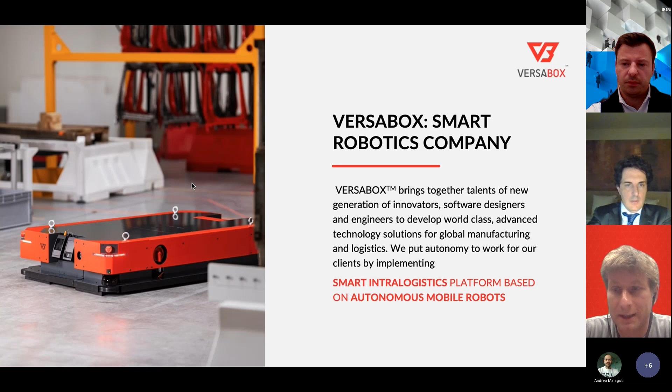But this story is important, because we have in our DNA industrial processes as well as industrial standards like safety, connections, IT, and so on. We really understand how it works and how the industrial environment looks like, and what we can expect from the process point of view, but also from the workers' point of view. This is why our robots and our system are designed exactly like they are.

The main pains in the case of intralogistics, which you probably already know, I'll go briefly through. First is lack of workers—this is in our region. Probably in Italy it's more about cost instead of lack of workers, but in Poland and Czech Republic, in our region, there's really a problem with workers.

And they're becoming more and more costly. What does that mean? If we use these costly and unavailable workers for simple tasks like moving or pushing goods within your processes, we waste their skills—meaning we're unable to use their hands, brains, eyes. Even the worst worker has a supercomputer in his mind, in his head.

Another issue is operational risk. If heavy equipment is utilized and operating among humans, it's pretty risky and a lot of accidents may happen. Efficiency is another problem.

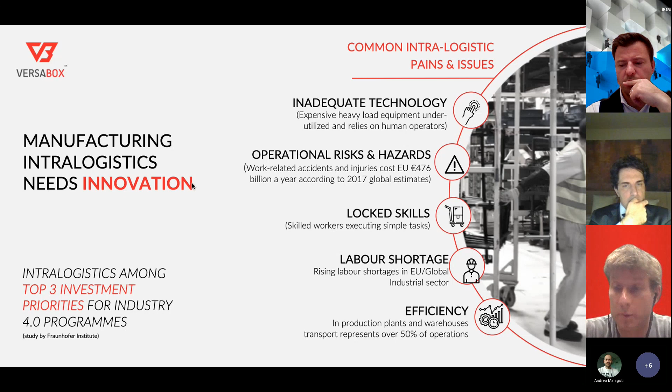If you have no workers, or they are rotating and making mistakes—there are a lot of companies whose processes are based on human experience, meaning that if those workers retire or change jobs, you lose all that knowledge. In the case of an automated system, if it's properly designed, it will stay and keep operating even if those experienced people change jobs.

There are a lot of reports indicating that automation and robotization are an important part of company growth, efficiency improvement, and savings generation, and so on. I don't want to talk too much about this, but based on this tendency and these pains,

we decided to implement on the market our product that we call Autonomy at Work, and how we think about intralogistic processes and their automation. First, we believe customers are not just looking for robots—the robot platform is just a part of the process, part of the story. Customers are looking for, and need,

an end-to-end solution—a system that can be fully integrated with hardware and software facilities, that can be managed, properly designed, and operating in a way that allows you to achieve your process KPIs, improve efficiency, and generate savings. This is exactly what we are delivering to the market: Autonomy at Work is a whole package, an end-to-end solution that can be implemented in your process.

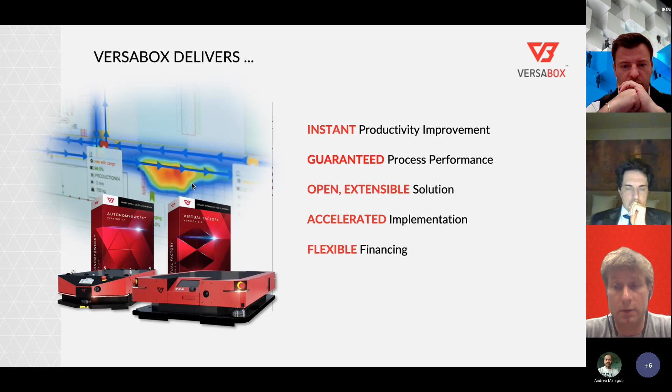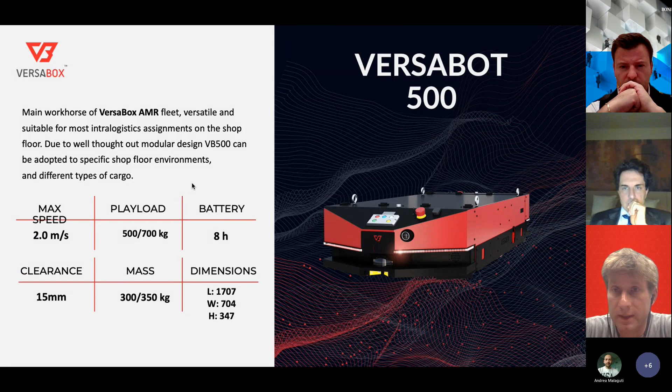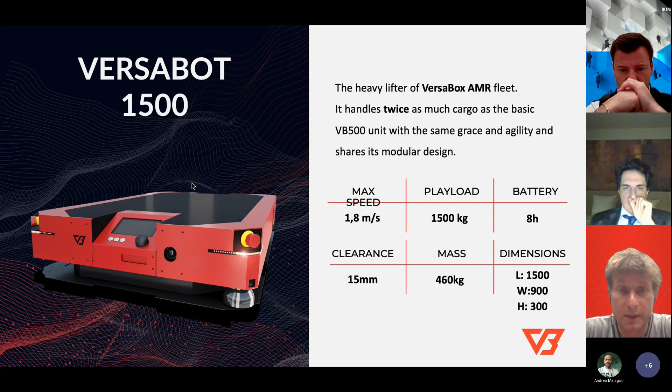Portfolio. Right now we have in our portfolio two mobile platforms: VersaBot 500 with payload up to 500 kilos, and VersaBot 1500 with payload up to 1.5 ton. Both of these platforms have a different construction, but use exactly the same software for navigation, autonomy, process management, fleet management, and so on and so forth.

From the beginning, because of our industrial history, we thought about this system as a modular one, where we have the standard platforms, and then we deliver different tools.

Some of those tools may be standard from our point of view and could be used relatively easily in different types of processes, for example like a lifter or a special transportation platform where the robot is equipped with a mechanical lock. We are able to dock under this platform, lock it, and tow it to the destination, or exchange empty for full, and so on.

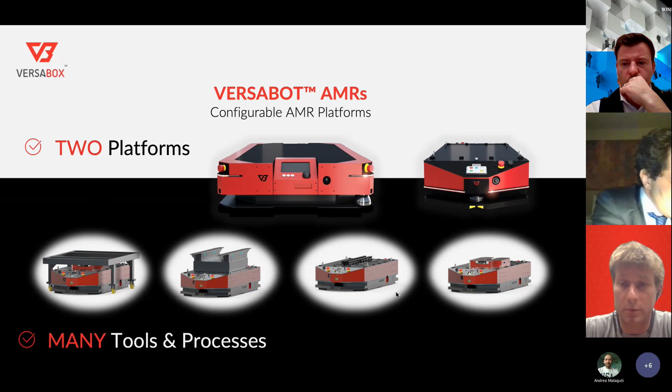And also permanent lock that allows us to connect our platform with some more advanced or complicated automatics like robotic arms or grippers, and provide more tailored processes. But this modularity gives also another advantage.

First of them is easy and simple after-sales or service maintenance processes. If we have the modular structure, we are able to replace relatively easily the whole front with the sensor safety system, or drive units with the drives, gears, electronics, and so on, and the robot can get back to the process relatively easily if any problems happen.

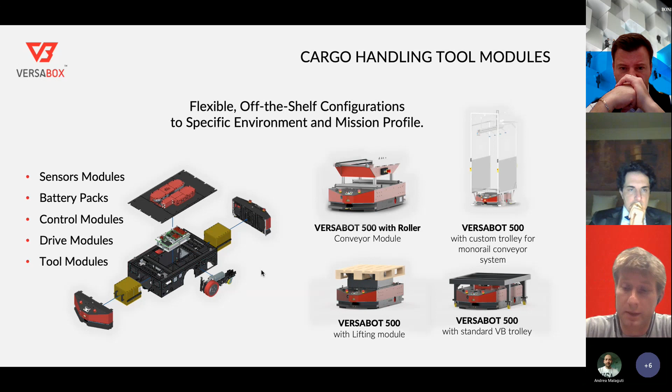That means that we and our partners are able to guarantee better and faster after-sales services, and probably better SLA than others. But modularity also means something different: it's a system that could be tailored relatively easily to the customer's needs.

For example, this is a real case that we already have. This is for the tire industry, and the goal was to drive with big truck tires, okay, twice bigger than the robot itself, this VB500, but not so heavy that it makes sense to use the more costly and bigger VersaBot 1500. We are able to use the heart of the robot, the main unit equipped with electronics, drives, computers, and all the autonomy algorithms, and replace the front and sensors with the tool, integrating the tool with the robot, and have, to be honest, different robots, but based on the same system.

It's easiest for us for production, but also for the customers and us for deployment, because the procedures look exactly the same, as well as after-sales services.

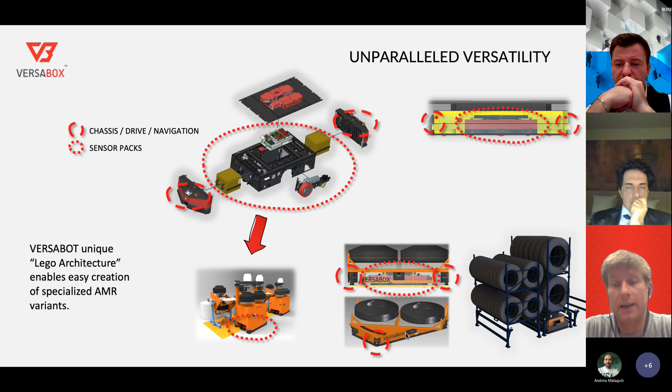Autonomy at work: our system consists, of course, of robots, as I mentioned. They are responsible for the physical part of the process, and the rest is software. Software responsible for environment mapping, path designing, process design, and process control.

The newest part of our system is the virtual factory, and this is the module that allows us to build the model of your process, design the process, simulate it, and start discussion about the process data, working with our partners and customers based on real data instead of some feelings about how the system may operate. Optimize the system, and finally deliver the optimal solution to the customer. About the virtual factory, I will tell you a little bit more later.

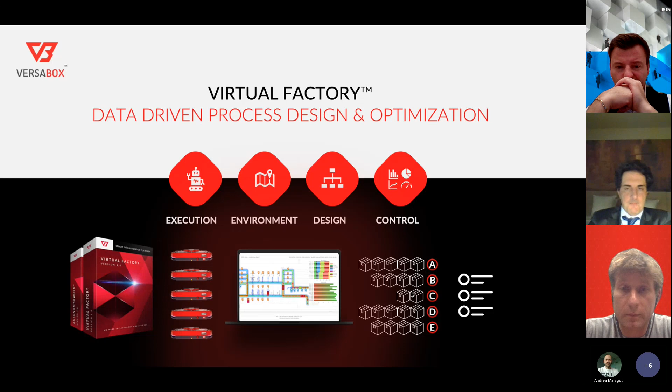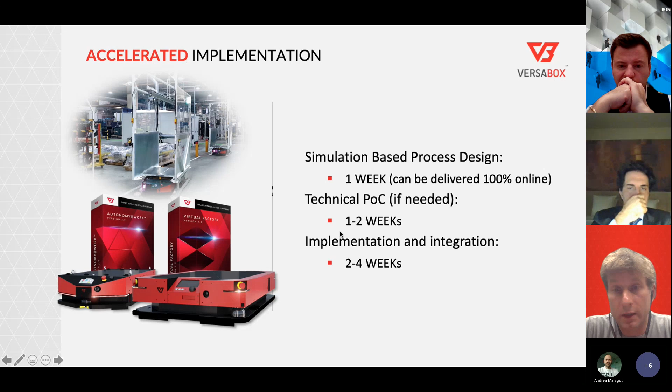But if we have such a complementary system that consists of robots, autonomy, fleet manager, multi-robotic system, and virtual factory, we are able to implement the whole process relatively easily and fast. Based on the simulation, we are able to design and check the process, check all the bottlenecks and possible issues, design the process virtually in our lab, and then arrive on site with the final solution. That allows us to reduce implementation time.

We are also offering different types of financing, and this is also related to the new concept of Industry 4.0 — customers are looking for new solutions for financing such systems, and we try to be flexible. We are offering the system in CapEx, but also in OpEx, where you can rent or lease. And sometimes we are also able to consider some hybrid solution.

For example, hardware can be delivered as CapEx or OpEx, and the server that is responsible for the process can be delivered as software as a service. And you can also manage your cost and your budget in a different way.

We are located in Poland. We directly cover our region: Poland, Czech Republic, Slovakia. But right now we also start to grow outside of our region. We have our first partners in Germany, one in France, and of course a big and one of the most important of our partners or dealers, CLS, which I mentioned, from Italy.

Main customers that we already have include Faurecia. This is our biggest customer, but we also delivered our system to Hutchinson, ABM or HAF, and to some Polish players like Padmark, which is a big producer for IKEA, Cisowianka, a producer of bottled water, or Lubella, the biggest Polish pasta producer.

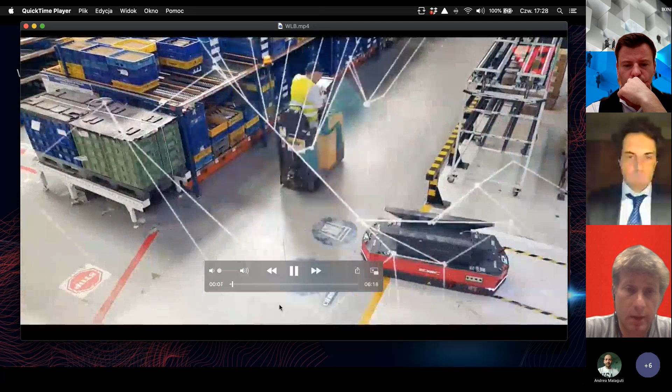This is the Faurecia plant in Poland. The system you see on the screen has already been operating there for more than 3 years, and we are responsible for right now 85, even 90%, of the internal transports within the process. This is just the beginning. In this case, we deliver the production parts from the warehouse to the production welding stations.

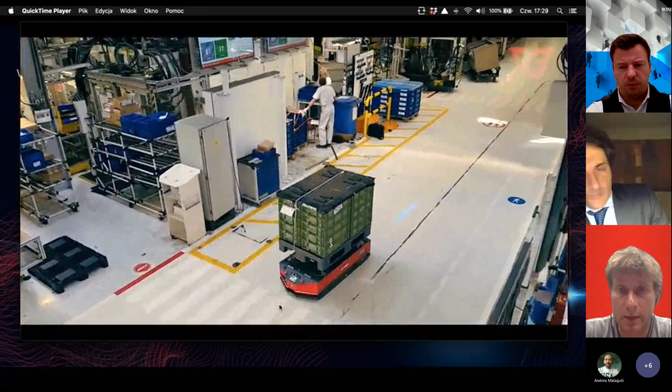As you may see, the robot is equipped with a lifter dedicated for palletized load transport, operating in full autonomy — no induction wires, no magnetic tapes, no mirrors. It navigates based on the natural environment, operating between humans, logistic trains, and different types of trolleys located randomly everywhere in the plant.

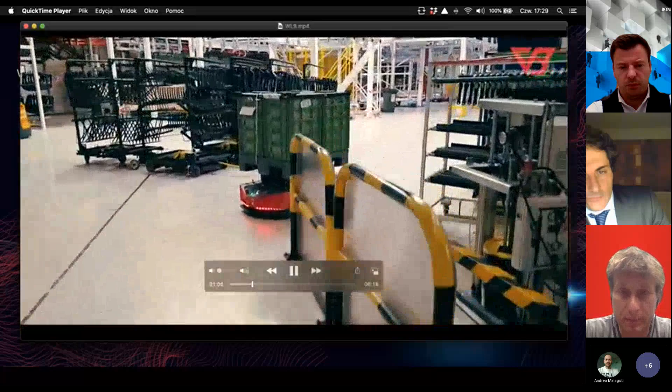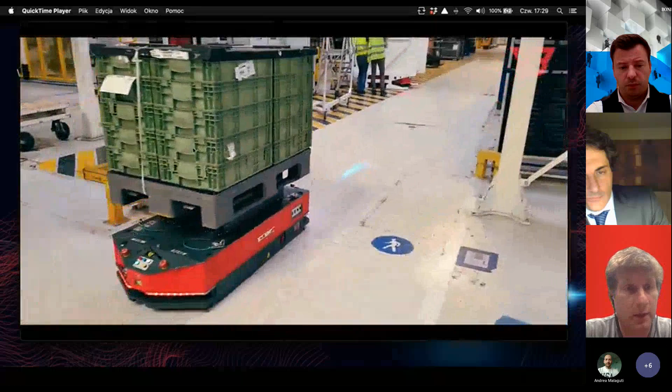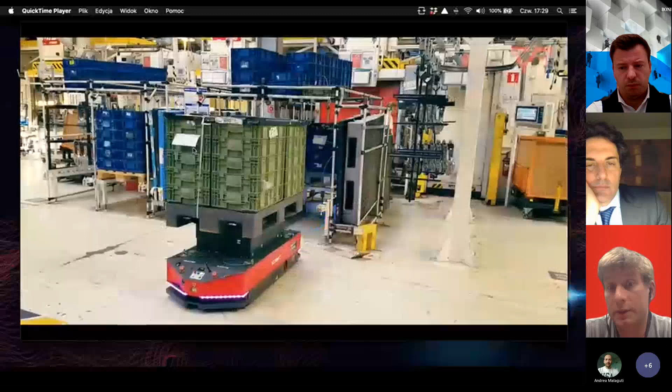The system is fully certified — we mark the CE, but it has also been confirmed by a third-party audit. The German company Elokon checked the system according to all the standards that should be kept by such a system, and it's fully safe.

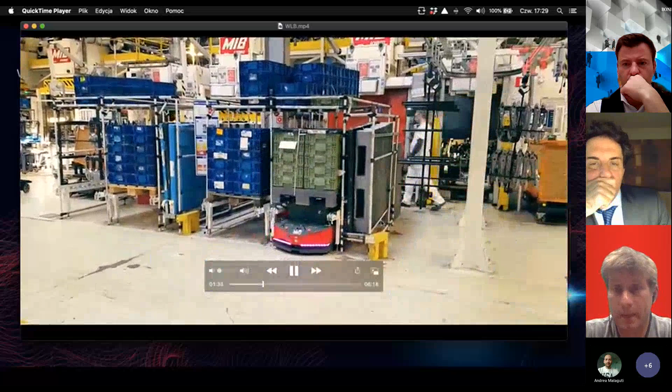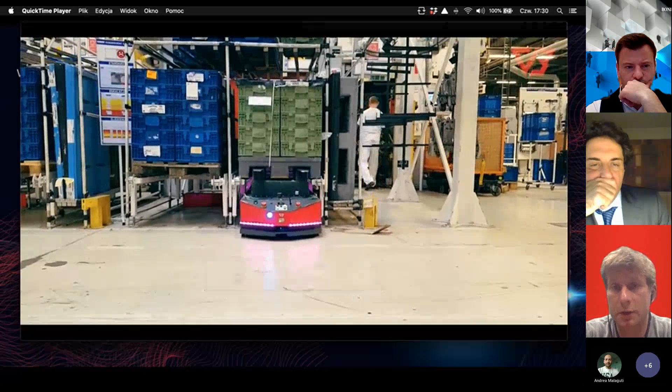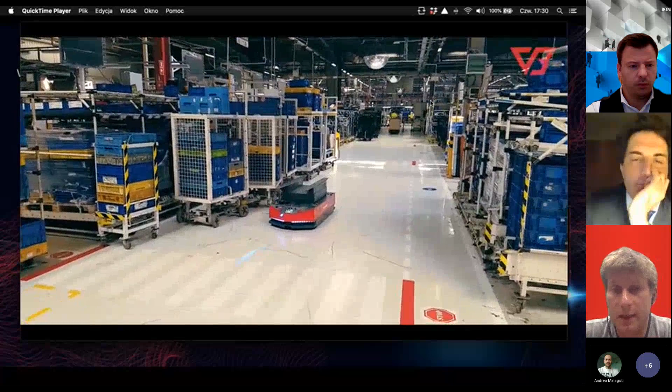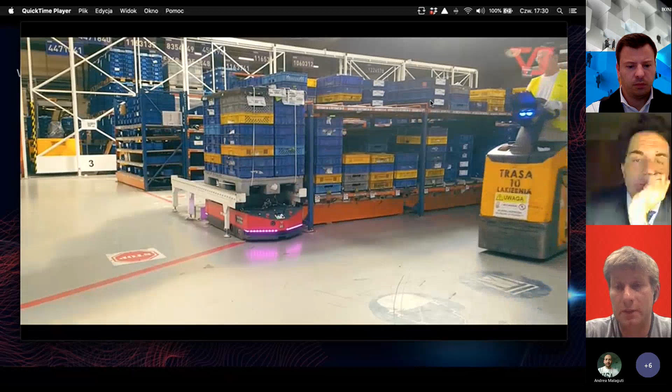As I said during my presentation, we deliver the whole solution — robots, tools — but the system is also fully integrated with production. The operator here has touch screens with our software, our application. He chooses on the screen what kind of references are needed for production. This information is sent to the warehouse management system. Then the reach truck operator picks up the proper reference, marks it on the tablet, and our fleet manager takes the task and is responsible for delivery to the final destination.

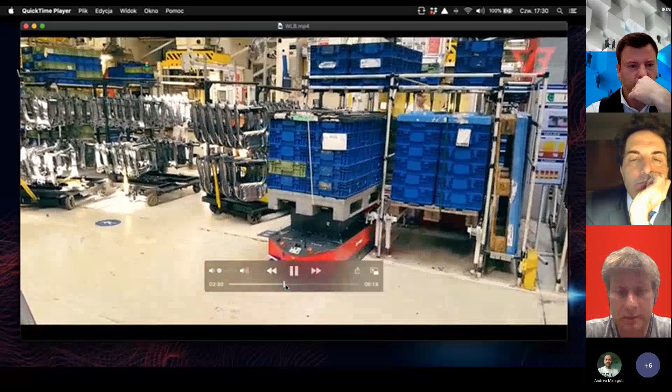I will move the movie forward a little. Oh, this is a good example — we are operating in really narrow corridors together with the logistic trains, and we're doing this with high accuracy.

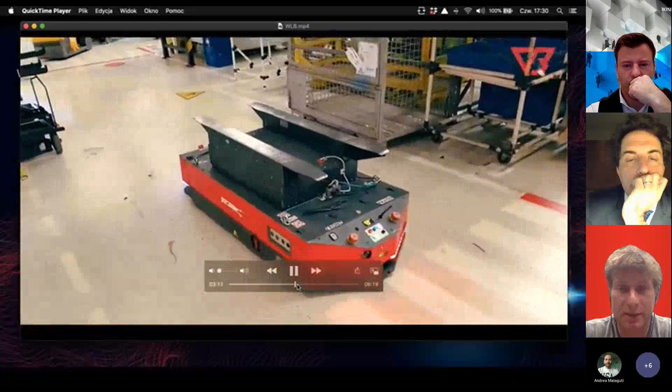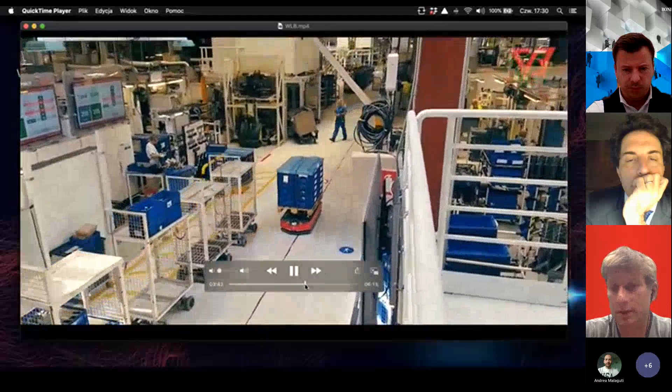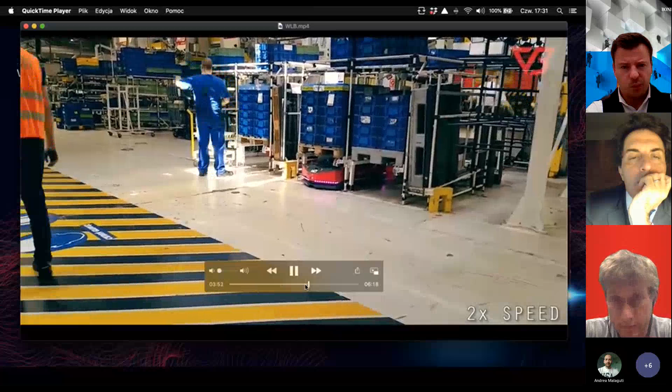This plant is like a hell — a robotic hell, with huge traffic, a lot of people, and a lot of randomly located obstacles. And to be honest, this is why Faurecia decided to use our system: we were able to show them that our true autonomy is efficient enough to provide proper efficiency, keep proper process KPIs, operate among humans, and be pretty robust.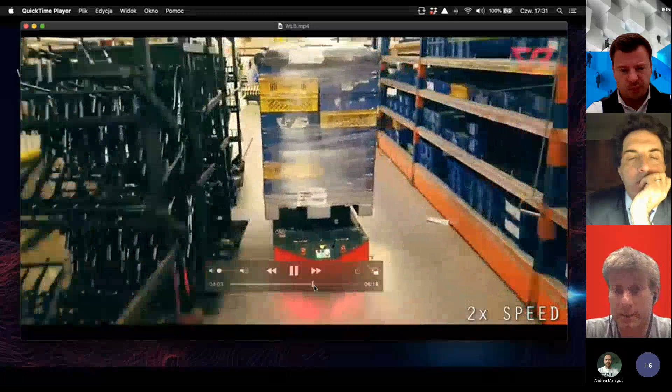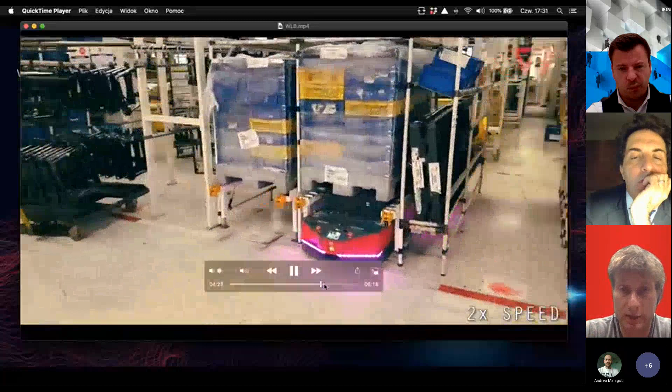But that was just the beginning, okay? We started with the transport of palletized loads between the warehouse and the welding stations, as you saw. Right now I will stop this movie and show you another one.

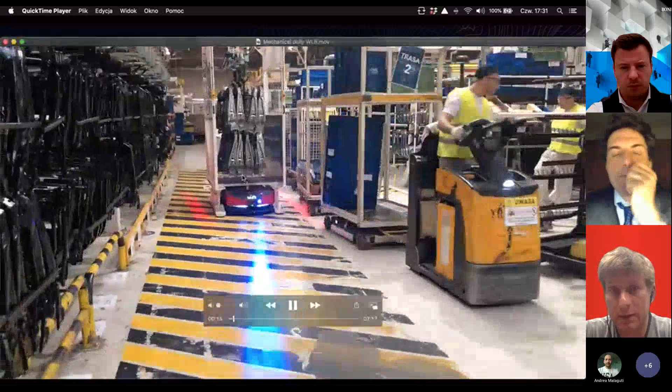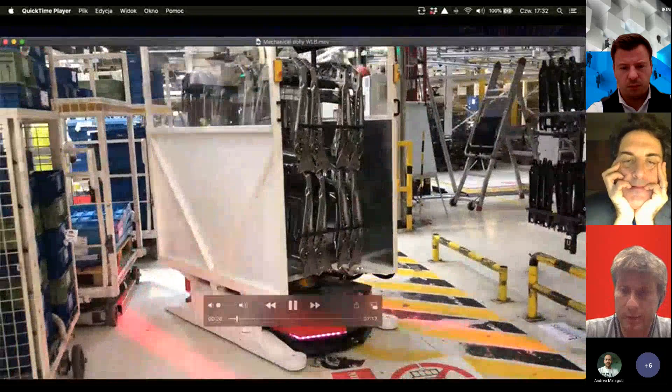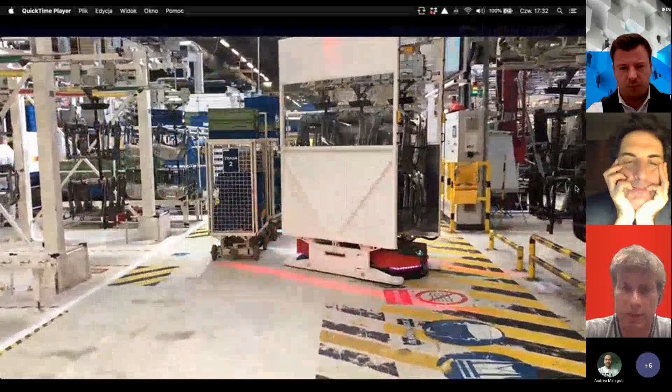After this first stage of the process, we started to deploy the next step. You saw how we deliver goods from the warehouse to production. Now, based on the same platform but with a different tool, we also provide transport of welded frames from the welding stations to the robotic paint shop, then painted frames from the paint shop to the assembly line, and empty hooks back. Based on this, we cover, as I said, almost 90% of the logistic transport in this plant.

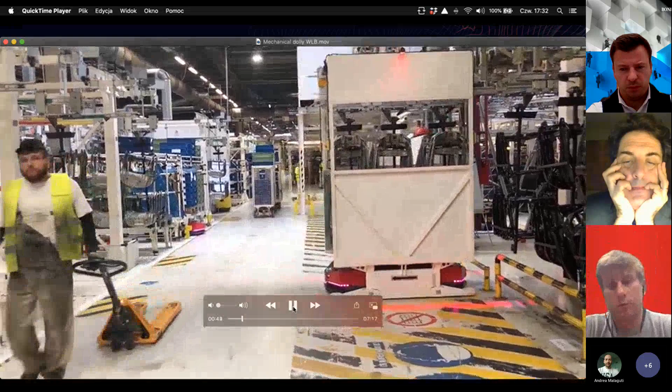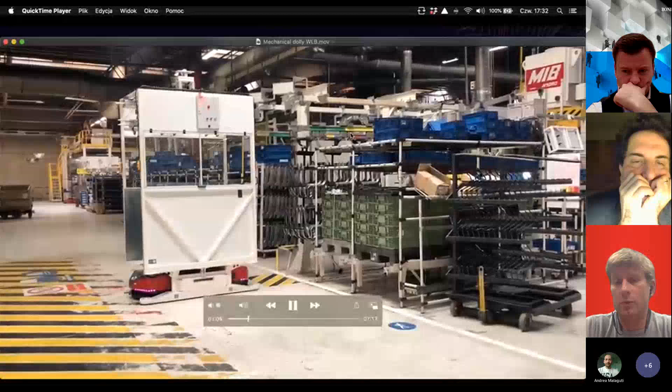In the background, you can see the first system still operating. What's important is that these two or even three different processes are realized by the same platform, equipped with different tools, managed by the same fleet manager and multi-robotic system, and fully integrated with the process. The production lines are equipped with sensors — we recognize when a whole batch of frames is ready for transport. The system automatically orders the transport, and we also prioritize the transports.

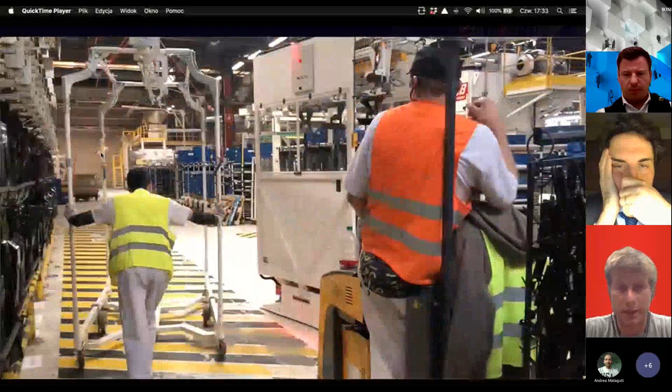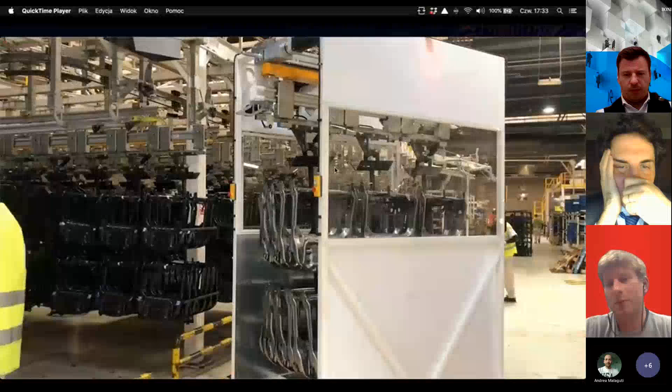Our system decides from which station the frames should be taken first, in order to prevent blocking of the production, because there isn't a huge buffer. The same applies in the paint shop, where we manage which area is almost full and take from there first. It was a huge problem before, because they had to hire a special person to decide from which station manual workers should take the frames. Otherwise, the production would often stop.

Of course, this is a tough job and people don't like to do it. There's huge rotation, and different slots are used for different frames, for Porsche, BMW, Skoda, or whatever. If you have new workers, a lot of mistakes may happen.

If we deliver the fully automated system, those mistakes disappear, and this is another advantage for such a solution.

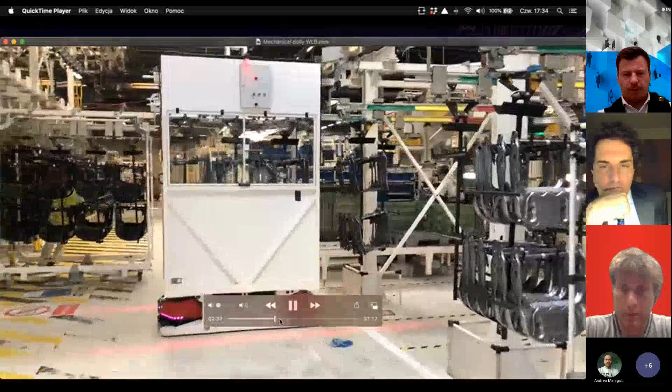Here you can see how high our accuracy is, that we're able to connect those two monorails in order to move the system, and that such systems can be integrated with standard automation.

This dolly has been designed especially for this process, but it's based on a standard Siemens PLC. Our system exchanges the signal and also the power with this dolly, but such solutions can be designed by any type of integrator. For them, it's a common job.

It's the same as with robotic arms. This is an example of how the multi-robotic system operates. The big robot sends information to the main server that a corridor in this area is blocked, which is why this one is waiting. Just while this one docks and confirms it's docked and will start the process, the corridor becomes free. Then this robot sends information saying it will occupy this area. Just when these small robots go through, the big one starts its operation once again.

Right now in this plant we have 10 robots, and they operate 24 hours a day, 7 days a week. It's a pretty good example of how such a fully automated system could cover the whole intralogistic transport within the production process.

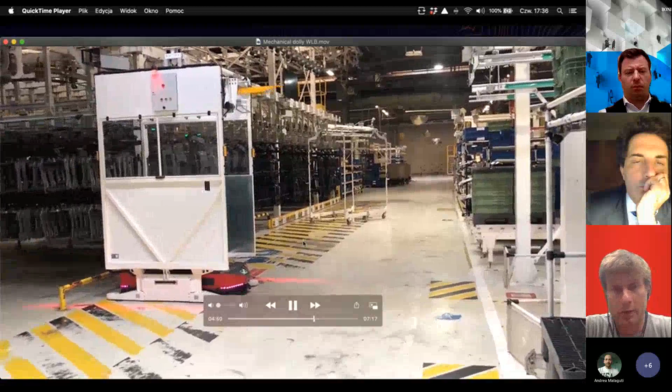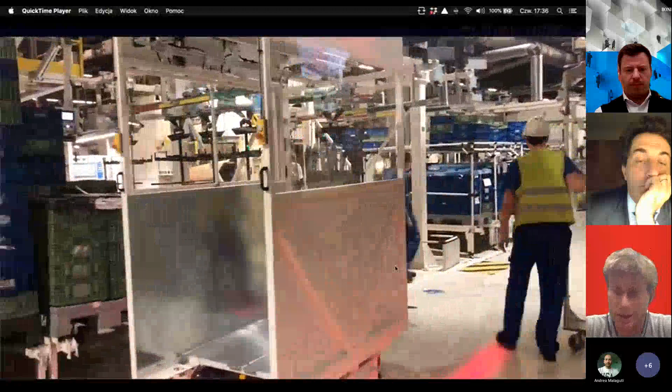But implementation of such a solution won't be possible without previous analysis. Ricardo also mentioned this. You can buy the robot, put it into the process, and finally you'll see that something is wrong, that the efficiency is lower than you expected. There are some issues, like the robot blocking itself, and so on.

This is extremely important if you think about automating the intralogistic process. First, you have to analyze the process, check the bottlenecks, check the efficiency, design the process properly, and then implement it. Otherwise, you may have a lot of problems. Of course, if you order one or two robots, you can manage this manually or even with an Excel spreadsheet, but if you'd like to have the whole fleet, it's impossible.

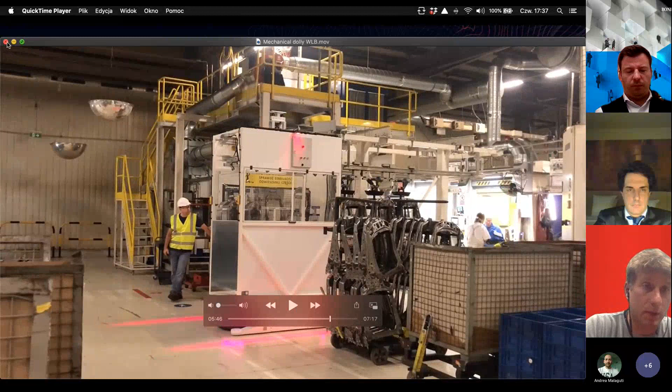And this is what we implemented into our product. Give me a second, I'll open the browser. Do you see my screen?

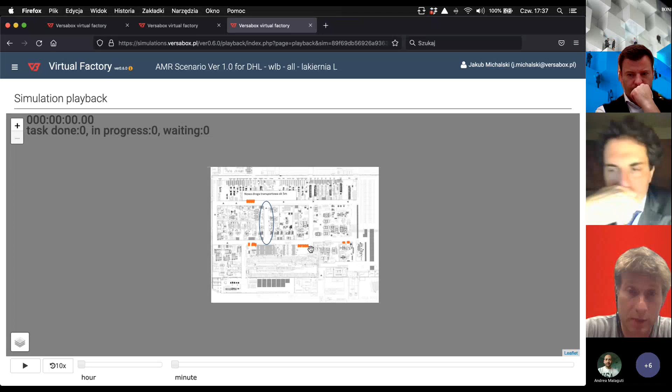This is how we work with customers, and how our partners, like DHL, may work with partners or customers. We start by analyzing your process based on your data. We ask about the layout, about process data like action points, and from where to where the goods should be transported.

I should change the example. Something is wrong, just a second. Oh, the action point, it's this one. Just give me a second, I'll load the simulation once again.

This is our virtual factory, a cloud-located tool that allows us to analyze the process. We ask customers about data, like a layout in AutoCAD, then about the points where goods should be delivered and from where. In the first iteration, we always ask how the process should operate in your opinion, how you see it, in which direction, which corridors may be two-directional or one-directional, and so on.

Which zones are prohibited for the robots, and then we design the process, how the robots should operate, where they should slow down according to the standards, start beeping, and so on, which areas are fully prohibited. Then we cut it through the virtual zone, and after this we start the simulation. This is the simulation of the process, the same one you saw in the videos, the first process realized by this lifter.

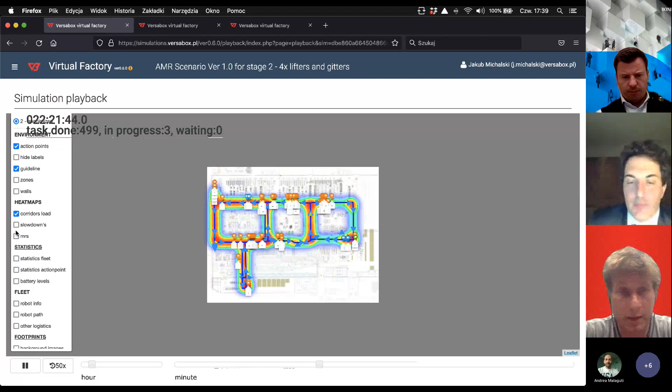Based on this simulation, we are able to start to analyze the process, for example which corridors are mostly occupied, where the robots slow down much more often, and where the multi-robotic system is stopping the robots.

In this case, it's visible, just the 4 robots in the big plant. And after this simulation, we deliver the data.

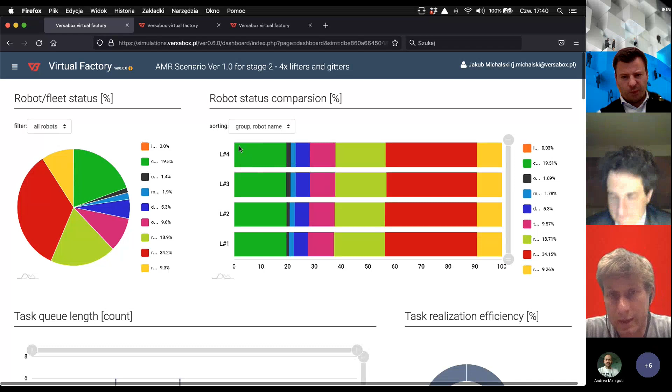For these 4 robots, we have the situation that we are able to analyze percentage of time where the robots are charging, percentage of time where the robots are charged but are waiting for tasks, percentage of time where the robots are stopped by other robots because they're waiting in the queue, having to give some space on the crossroads or on the one-way corridors. Then time necessary for precise docking, tool operation dependent on different type of tool in the process, ride empty, ride with cargo, and ride to idle.

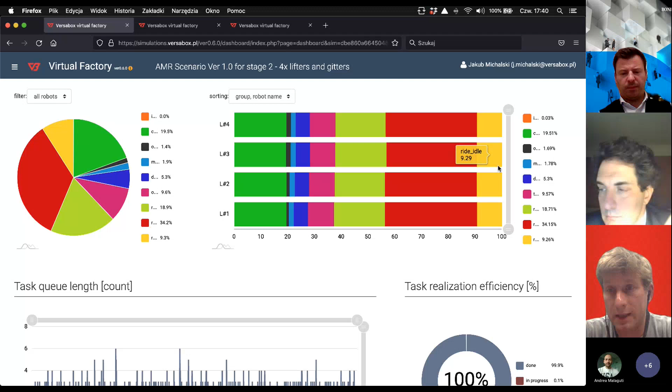That means the robots finish the task, get another task, and drive to the waiting spots or charging station. We also analyze some intralogistic data, process data.

For example, we take historic data or predicted data if it's a greenfield process, implement it into the model, and check for 4 robots how many tasks are waiting in the queue in each time period.

We also analyze the buffer occupancy, and can advise that maybe right now you need 4 robots, but if you add some buffers, maybe 2 or 3 would be necessary enough.

Then number of transports by action points, buffer occupancy, and also minimum, maximum, and average time from ordering the transport to delivery.

If we know the takt of the production, and we know that, for example, in GL3 production spots, the full process took, for example, 30 minutes or 20 minutes, we see that we are able to deliver on time each transport.

Waiting time from order to arrival, and also utilization of the charging stations. And that's also important because localization of the charging stations...

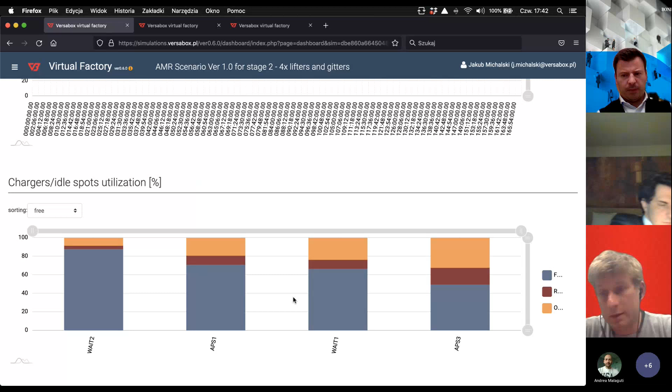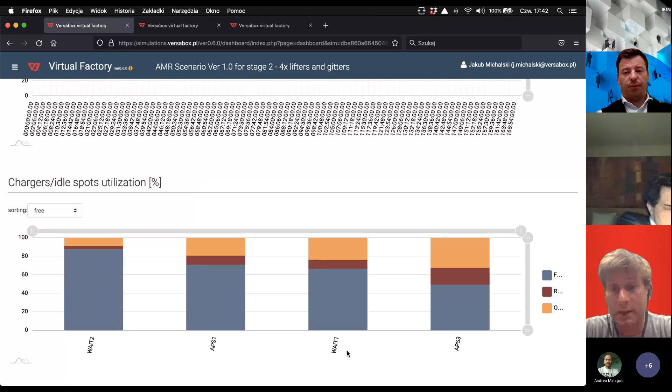Localization of the charging stations can improve the efficiency of the process, reduce this percentage of traveling to the idle spots, but also you don't need as many charging stations as robots. Charging stations are also not a cheap element of the process.

And we also check the charging parameters of the robots. And that was the beginning of the story, the first movie - the first process delivered to Faurecia.

Then they asked, okay, but now we would like to transport welded frames from the welding station to the paint shop, and then painted frames to the assembly lines. And it started to be much more complicated.

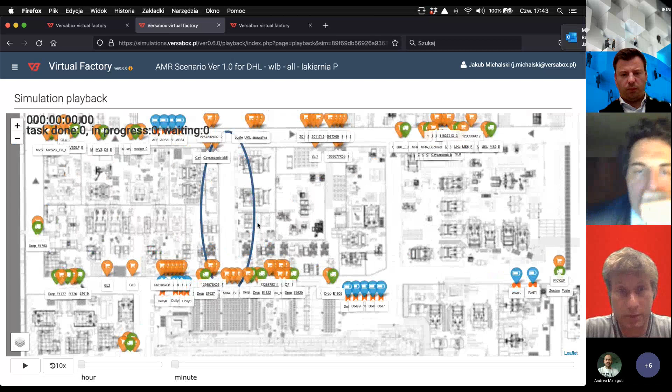The same layout, but 4 times more spots, and of course, much more robots.

The same parameters, corridors, the process has been designed, and we are able to simulate the process. Just give me a second, I will try to make it bigger.

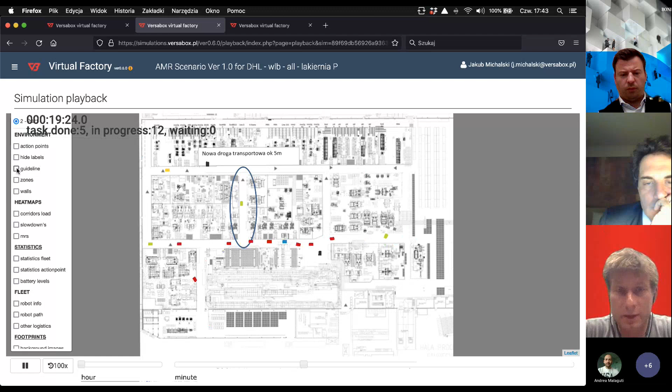Right now, it's a situation that you are even unable to predict in any way other than simulation. There's too much interaction between the robots, production, corridors, and so on and so forth.

Based on this data, we are able to check corridors and areas where the robots slow down. It's visible that something happened here, because this is the departure area.

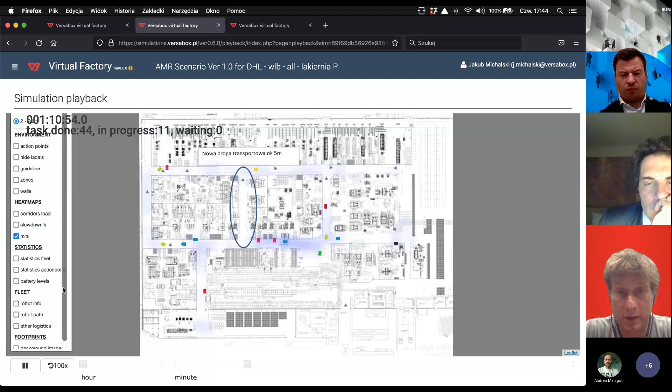And MRS shows in which areas robots are stopped much more often by other robots. You see here the long queue because the corridor is thinner here, and also because this is the most crowded corridor in the plant.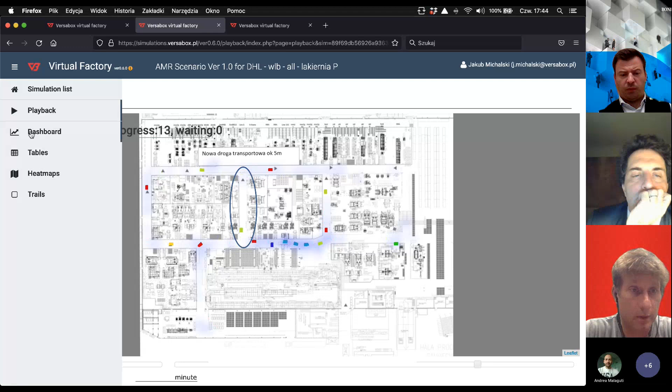And how the results look like in this case. See, we have 11 robots. This one is responsible for the frames.

We had to increase the amount of robots with the lifter, because if it's more robots, that means the traffic is higher, and we had to add more robots in order to achieve the KPIs for these lifter processes.

But what is important here? In this case, the process can't be realized by such a fleet because of the size of the corridors and some other parameters that you saw in the movies.

After 9 hours, the queue of waiting tasks has been growing, and within 48 hours, we realized just 95% of the tasks. Then we start to analyze what can be the reason and what can be improved.

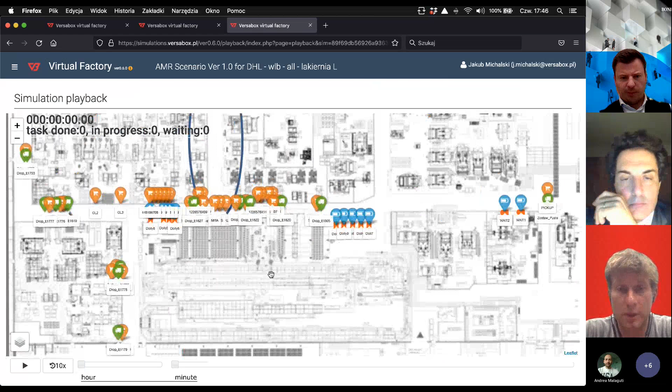We discussed this with the logistic engineers from Faurecia and process engineers, and we offered some small changes. I'd like to say small change, big difference. Sometimes it's not necessary to provide huge revolution in the layout or process. Sometimes some small change allows you to provide the process much more efficiently. You can do this based on our partner's experience and the simulator, which gives evidence that these changes can influence the process and give you better return on investment, because sometimes you're able to reduce the amount of robots or charging stations while still guaranteeing the process meets your KPIs.

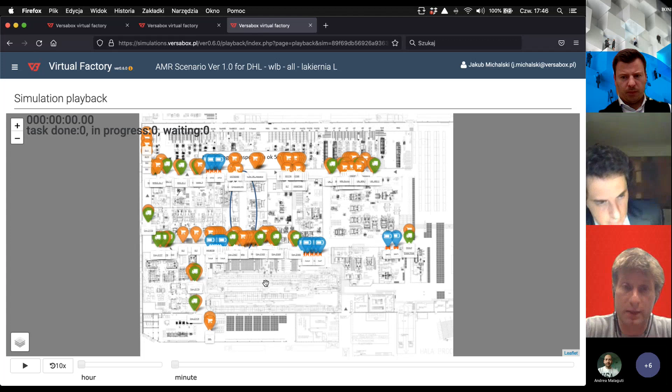We offered a few changes here. At first, we changed the direction of movement. We asked if this corridor can be bidirectional, and we also asked if it's possible to replace the entry to the paint shop from this area, as far as possible on the left side. Okay, then I started the simulation.

The system starts operating, and look, the situation looks different, especially here. Here it's exactly the same, because these are the 4 robots operating from this area. It was even visible at the beginning.

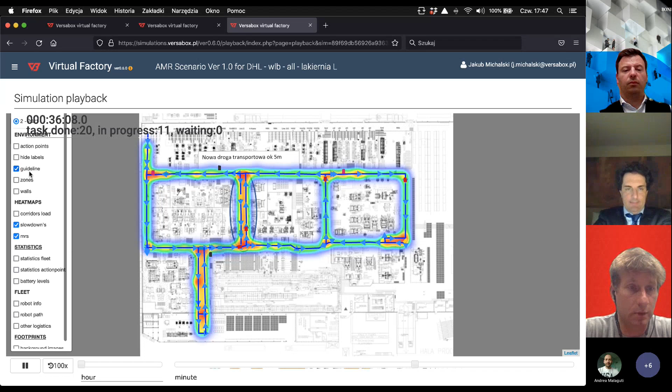Right now I'll show you the results. Of course we're able to see statistics in real time: action points, occupancy, and battery levels for each robot.

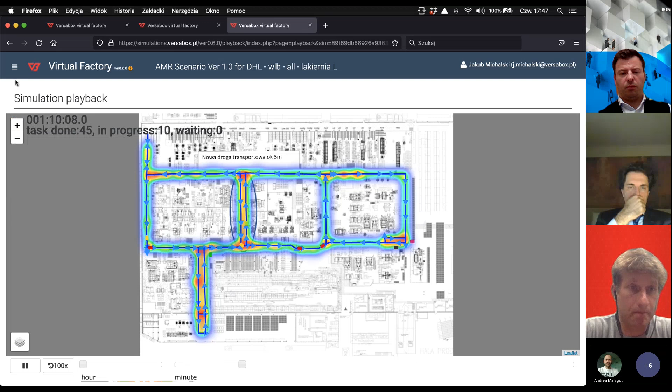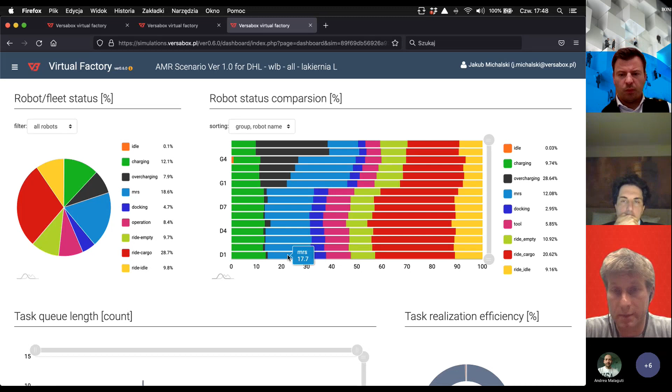After this, with the same amount of robots, the situation is slightly different. We reduced by 8% the time where the multi-robotic system is stopping the robots.

We keep the same amount of robots and completely change the process, so that now, after 9 hours, it's still stable. Some peaks may happen, but these peaks are from the production schedule.

Here, of course, we're able to discuss with the customers if this peak can be reduced, or if it's not a problem because we still have time, even if some tasks are waiting in the queue. If we have 30 minutes to deliver the goods, it might be okay.

And other data like buffer occupancy and so on and so forth, and also the amount of charging stations.

As you may see here, instead of 11 charging stations, you can have just 6 or 7, and it's a huge difference in the price. The system also allows you to operate without any breaks.

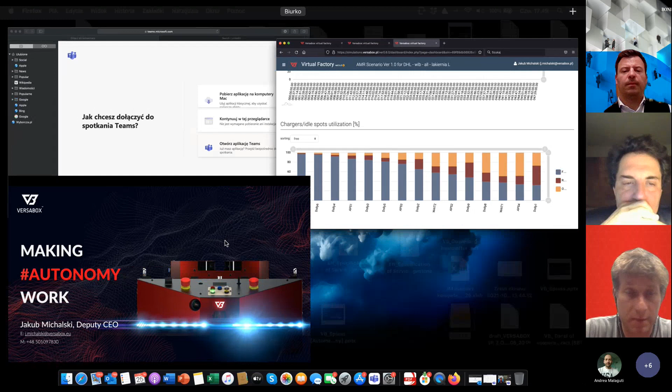This is the finish of my presentation. I hope I was able to present at first VersaBox, but of course also the idea of how we are thinking about the process. We deliver not just robots, we deliver our experience, our simulation tool, and finally an optimized and properly designed process that can be implemented.

What I really believe is that this is the only way. Otherwise you can make a huge mistake, ordering more robots than you really need. More robots sometimes doesn't mean better flow. You're unable to use an Excel spreadsheet for those tasks. It's a headache to try to calculate all of this, it's even impossible.

If you really think about automating the intralogistics process, you should start from a discussion about the process, data analysis, then discuss the real data percentages regarding the process, and then implement such a solution. This is exactly what we and our partners are doing. Thank you.

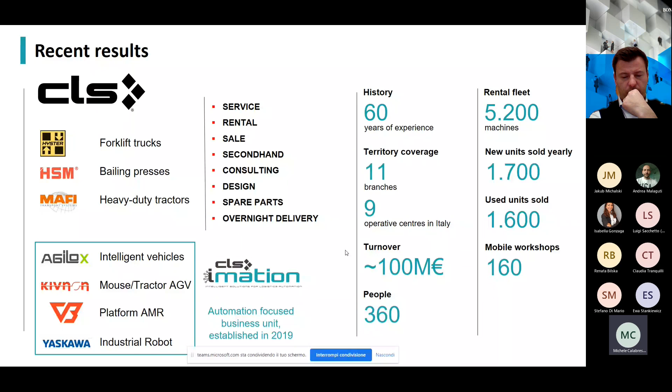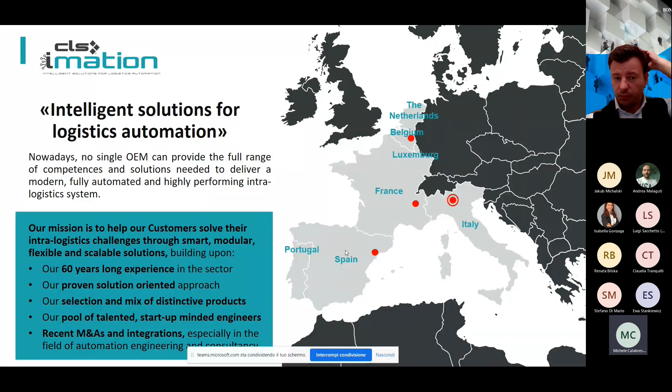We are what we do. We are using our 60 years experience in traditional material handling equipment to help the customer build up new workflows in their factories. We are based in Italy, but we are now working also in France, Benelux, and Spain. We are about to open new subsidiaries in those countries.

How do we work? You have seen already VersaBox as a versatile and flexible solution. It's modular, so as you can understand, it respects our principles of flexibility, modularity, and scalability. Every solution in terms of design, product, installation, and after-sales service is inspired by those principles.

The customers need to start with installations that are made in a brown field. It's not always the case that we are lucky to start on a new production plant on a green field. Usually we work in a brown field where the system has to be integrated. Integration in our view and vision requires those kinds of features, and VersaBox matches all those principles very well.

Flexibility means that the system has to be able to follow the requirements of the customers in terms of operation, peaks, layout changes, shifts. Also over time, the layout of a factory is always changing, so the system has to follow very well and very fast the changing of customers to match the requirement of the market.

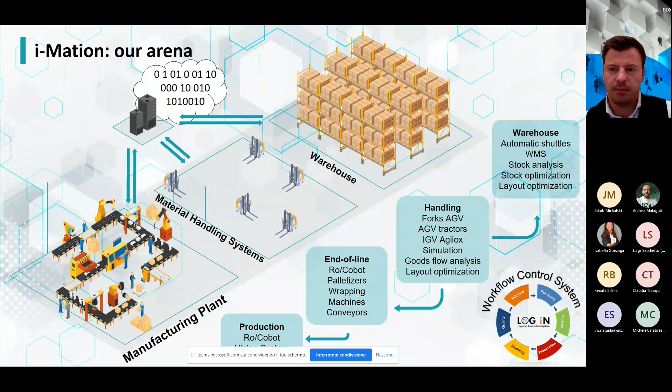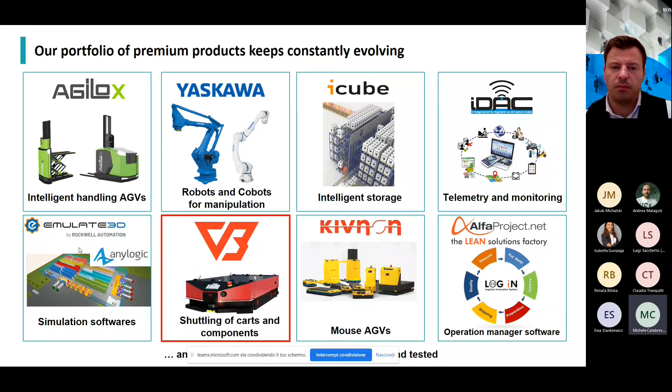So this is what we do, and VersaBox is welcome in our portfolio of products for the next development. If you have any questions, I'm free to answer you.

Thank you for your attention.